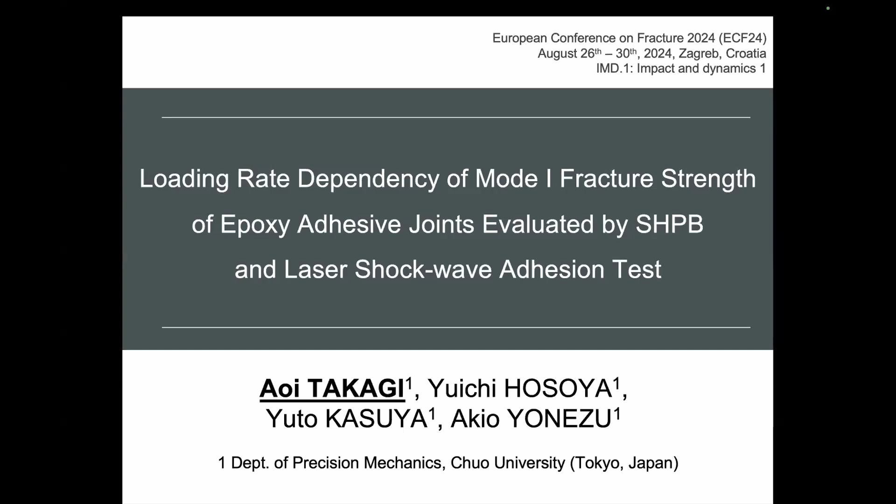So today I'd like to talk about loading rate dependency of mode 1 fracture strengths of epoxy adhesive joints evaluated by SHPB and laser shockwave adhesion test. Let me begin by talking about the introduction. First, I'd like to explain the background.

In the transportation and aerospace industry, reducing the aircraft structural weight and simplifying the manufacturing process are strongly demanded. To achieve this, adhesive bonding is attracting a lot of attention for fastener-less structures. However, adhesive bonding is not yet in practical use because of insufficient evaluation of strength reliability.

One of the reasons for the difficulty in strength reliability is the existence of strain rate dependency in mechanical properties such as yield strength, fracture strength, and deformation stiffness of an adhesive. Therefore, it is expected that the bonding strength of adhesive joints also exhibits a loading rate dependence. So evaluation of bonding strength at a high loading rate is important.

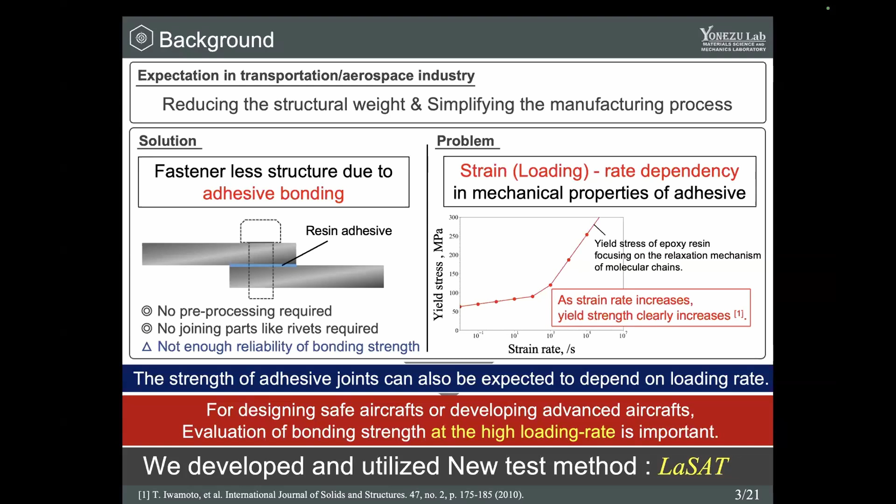So as a method at very high loading rate, we have developed and utilized a new experimental method, LASAT. In the next slide, I'll introduce LASAT. Here is an overview of LASAT. LASAT stands for Laser Shockwave Adhesion Test. LASAT utilizes a high-speed and powerful shock wave generated by laser ablation. LASAT uses a pulsed Nd:YAG laser as a driving force.

This is a close-up view of the specimen parts. As a specimen, the adhesive is bonded on the substrate surface. The EA layer is responsible for generating plasma pressure through ablation, and this study used a silicon oil-based viscous fluid. In order to keep the thickness of the EA layer constant, sapphire glass is arranged.

In the first step of LASAT, the pulsed Nd:YAG laser was irradiated to the EA layer. Then by the EA layer absorbing the light energy, it rapidly expands in volume and vanishes. This is laser ablation. Due to laser ablation, plasma pressure is applied and a compressive shock wave is generated. When this shock wave propagates through the specimen and reaches the opposite free surface, by free end reflection the compressive shock wave turns into a tensile shock wave.

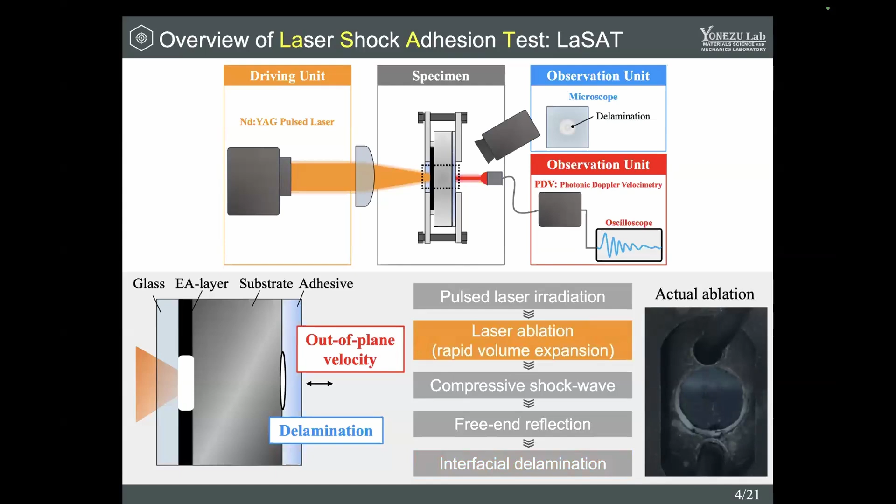Now let me explain the purpose of this study. In this study, we evaluated and clarified the loading rate dependency of mode 1 fracture characteristics of adhesive joints. We investigated two kinds of characteristics: A, fracture strength, and B, fracture toughness. This study conducted three kinds of experimental methods over a wide range of loading rates: tensile test, SHPB tests, and LASAT.

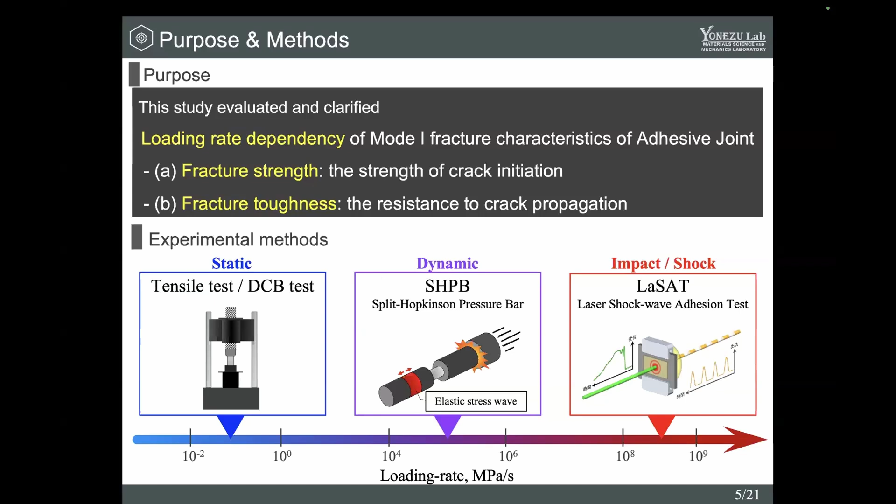Next, I'd like to talk about mode 1 fracture strength. First of all, we conducted LASAT. As a specimen, on the top surface of a mirror polished aluminum alloy, epoxy resin adhesive was cured with 100 micrometer thickness at room temperature for 2 days. In LASAT, we determine the critical laser energy. Critical laser energy is the minimum laser energy generating delamination, and it corresponds to the bonding strength.

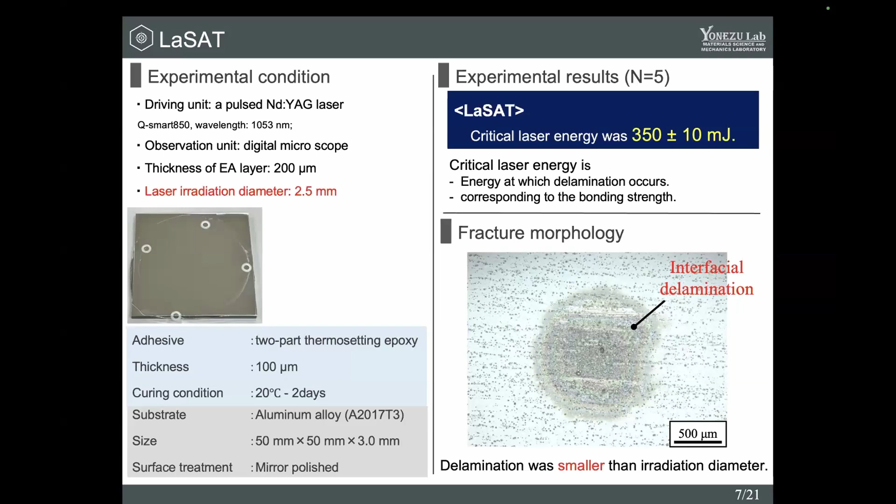As a result, we determined the critical laser energy was 350 millijoules. At this energy, we observed interfacial delamination as shown in this figure. In order to evaluate bonding strength quantitatively, we conducted FEM simulation. This is a detail of the FEM model. On the bottom surface of this model, plasma pressure of laser ablation was applied. This pressure history was estimated by inverse analysis using a Fourier response function.

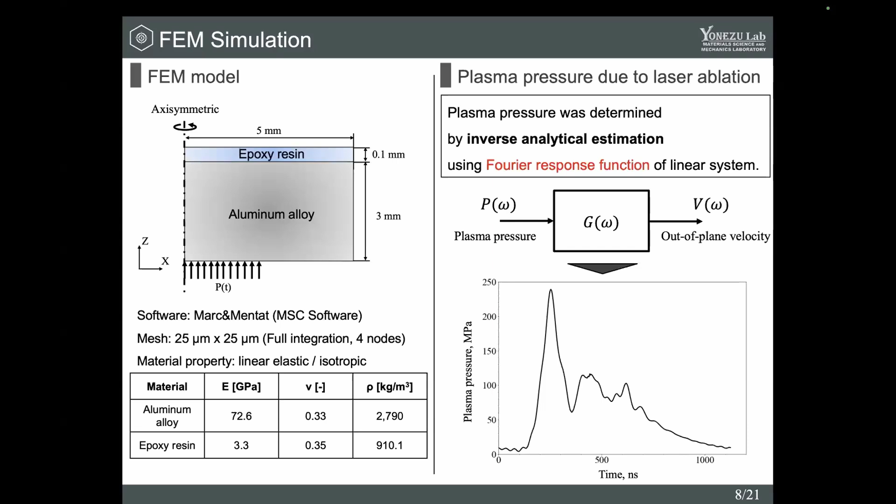This is the wave propagation behavior of FEM. The contour map displays the stress component in the Z direction. First, at the beginning of propagation, a compressive wave was generated. Then, when this wave reaches the free surface of the FEM model, by free end reflection this wave turned into a tensile wave. This behavior of FEM was similar to that explained in the overview of LASAT. Then we obtain the interfacial stress at the center of this model.

This study defines the peak value as the bonding strength of adhesive joints. So the fracture strength of LaSAT was determined as 116.3 megapascal.

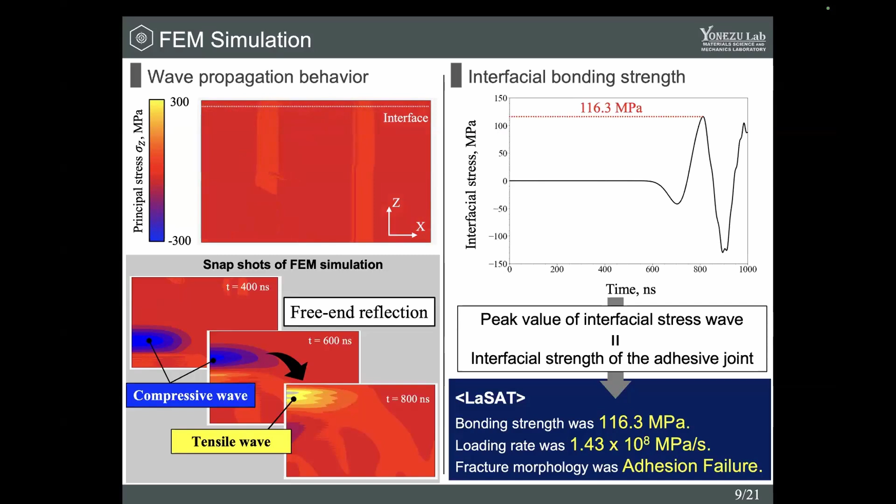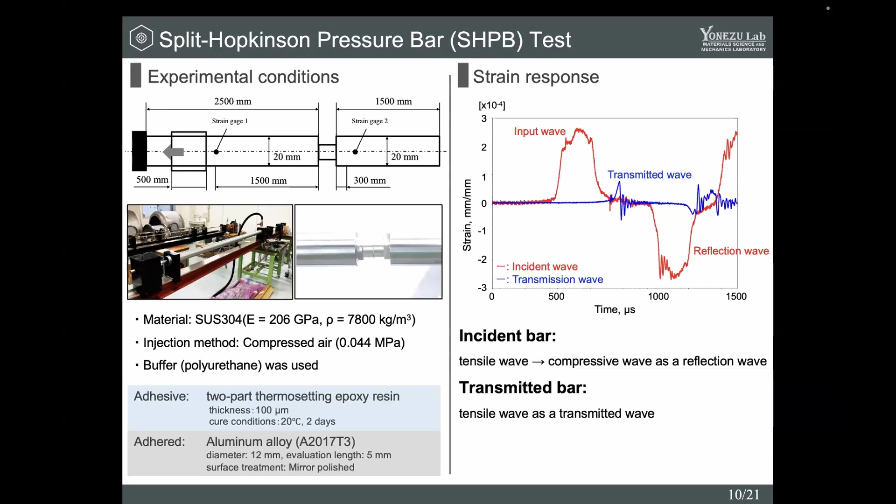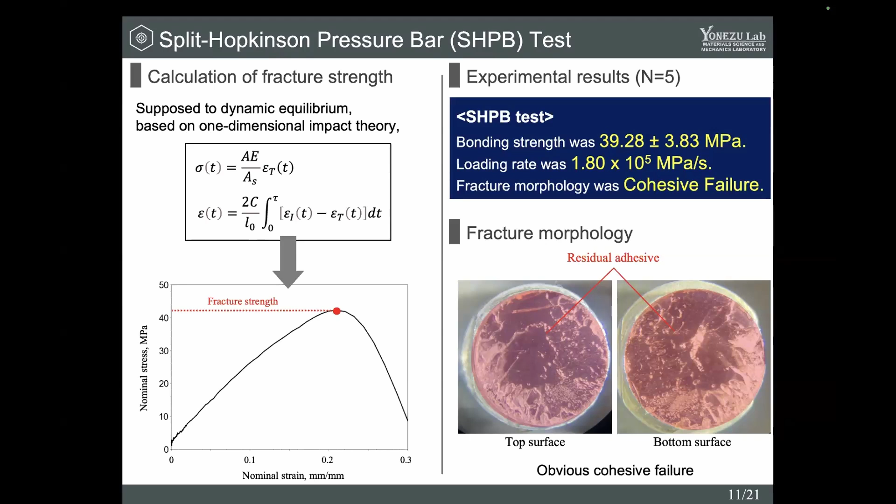As a result, bonding strength of SHPB was defined as about 40 megapascal, and fracture morphology was cohesive failure. In addition, we conducted quasi-static tensile test. As a result, in tensile test, bonding strength was determined as about 14 megapascal, and fracture morphology was cohesive failure.

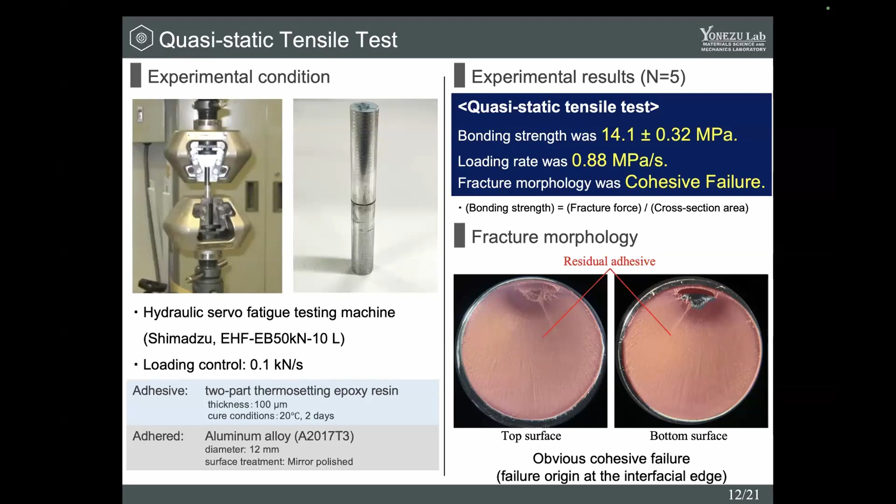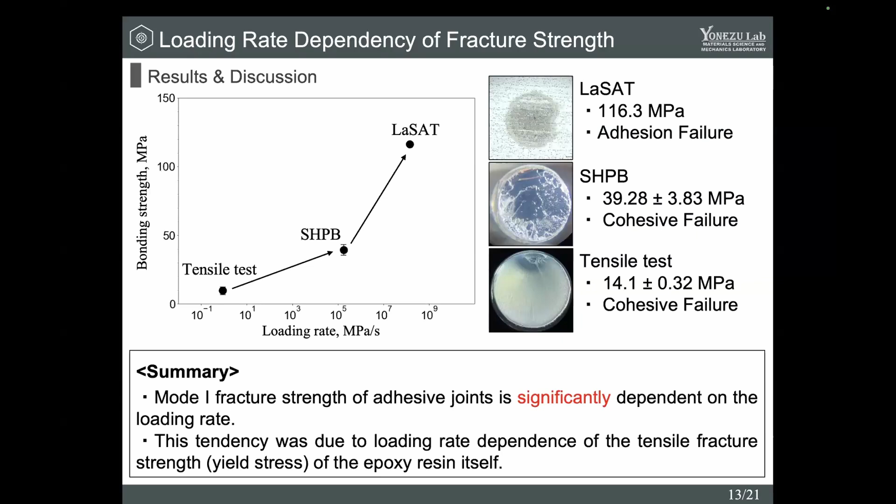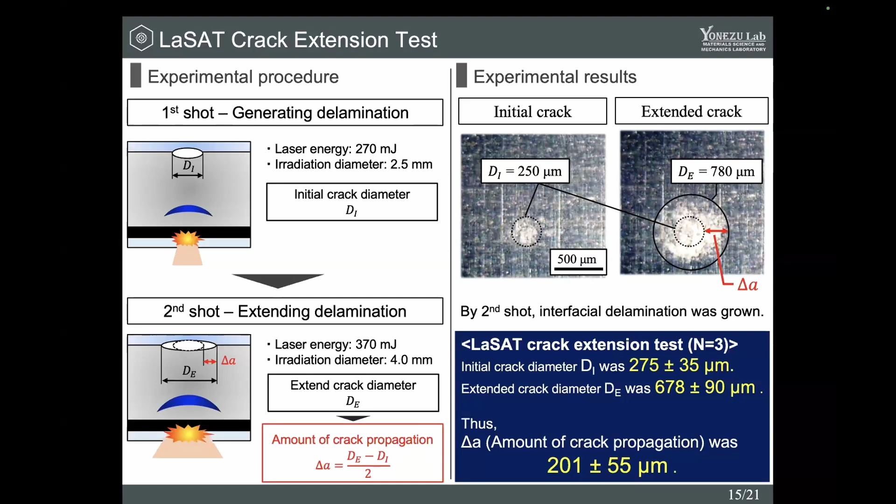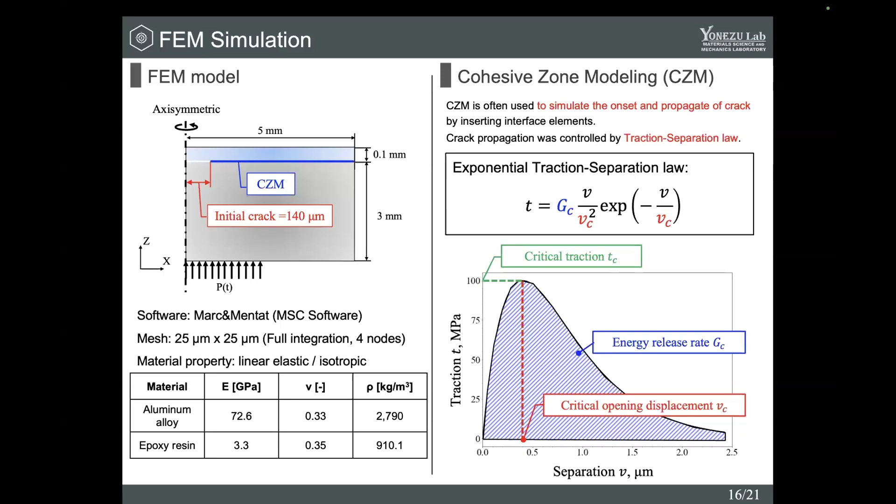In order to determine impact fracture toughness, we explored critical energy release rates that could reproduce the experimental results. This graph is the relationship between energy release rate GC and the amount of crack propagation obtained by FEM. According to this figure, we could determine the impact fracture toughness as 185 joule per square meter.

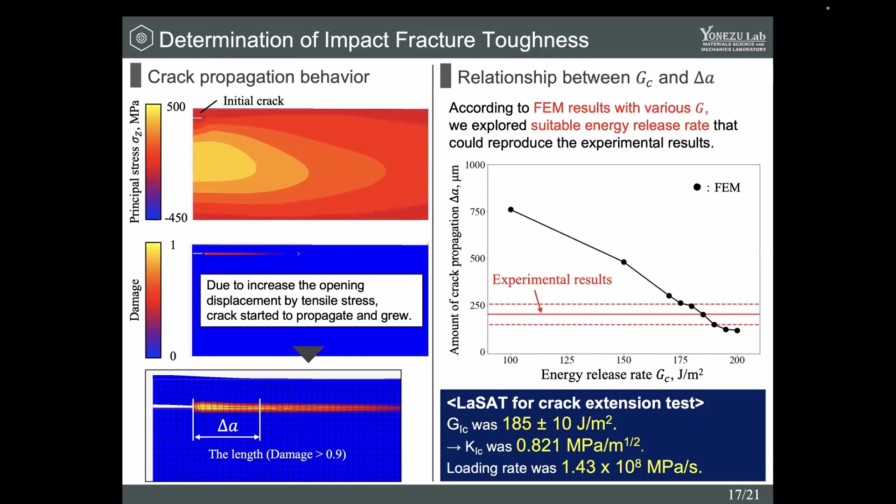In addition, we conducted quasi-static DCB tests. This is an example of force displacement curve obtained from DCB test. And using this curve and this equation, we determined G1C was 115 joule per square meter.

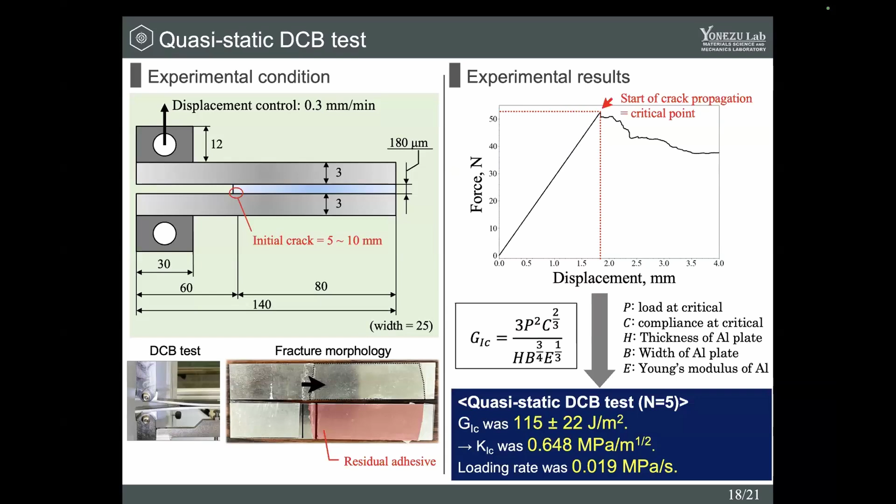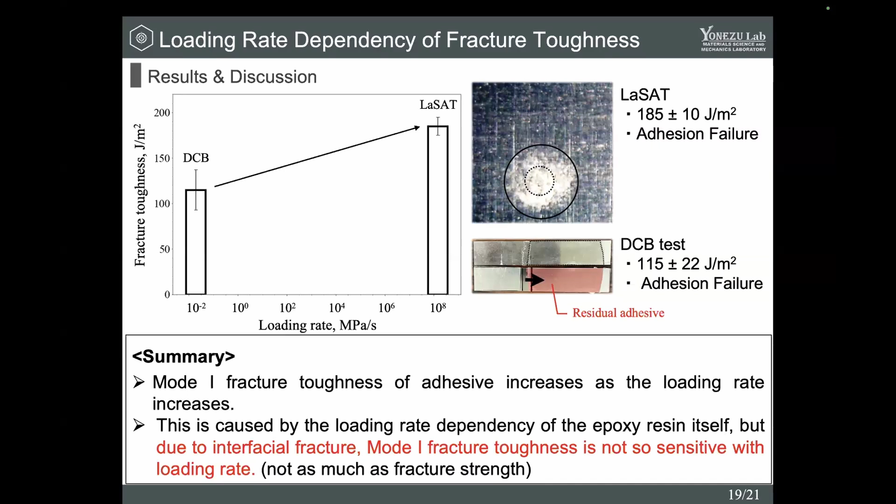I'd like to conclude by making the following points. This study evaluated and clarified loading rate dependency of mode 1 fracture characteristics of adhesive joints. The main findings of this study are as follows.